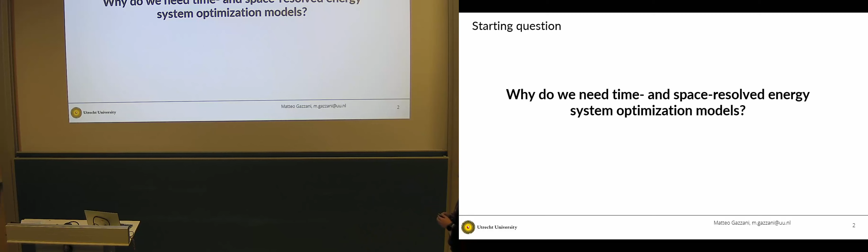Because we are not at a conference but more a cozy setting, I would like to start with a question for you: why do we need time and space resolved energy system models? And if it works, let's see... No, it doesn't.

It doesn't at all. Okay, well we skip that then because it was a Wooclap where you had to vote to actually put in stuff, but I have no clue why, transitioning to a different computer, it doesn't work. Or, no matter, okay.

I'll give you my answers, which of course are only partial. That's a bit how we like to use system optimization in our group, to support better understanding of non-intuitive complex systems.

When I was a PhD, I really didn't want to go into optimization. I was always of the belief, I understand this, I can understand how it works, let me look at the physics. Then I realized when you go with the time, and you have millions of variables, right? Forget about it.

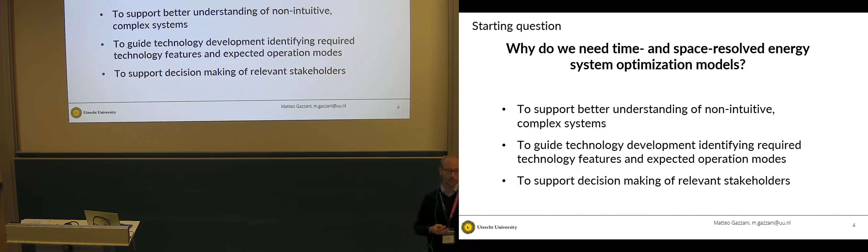Second, as Luca already mentioned, to guide technology development, identifying the required features based on the expected operation. And last, very broadly, to support decision-making of relevant stakeholders.

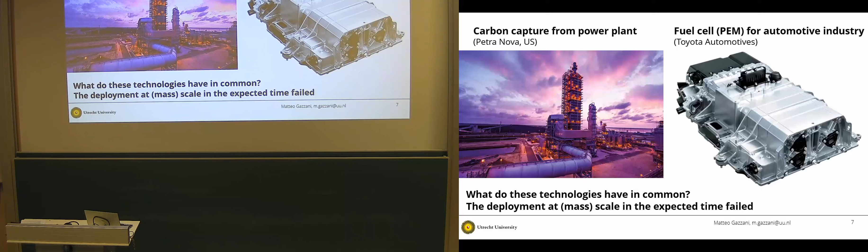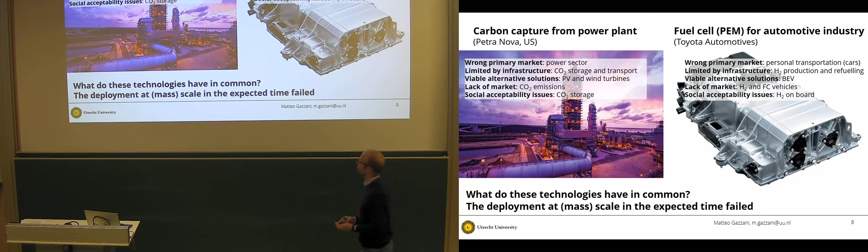Now, last year I talked about this, so just a recap. I showed this slide with two different technologies, and I said well, they both failed to deliver at mass scale because of a number of common reasons: wrong primary market, limited infrastructure, viable alternatives, lack of market, and social acceptability. Then I concluded technologies need to be developed while evaluating their role in the broad energy material transition. And I think Luca gave a nice example of what we can do.

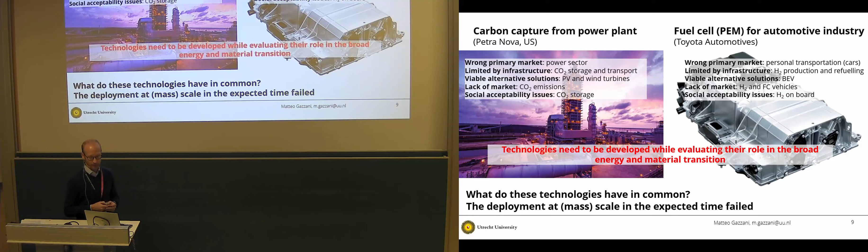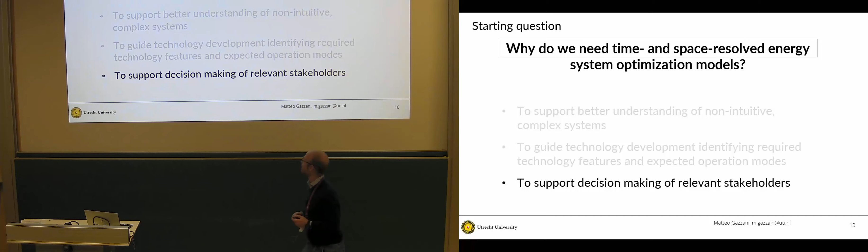Today I will talk about the last point, to support decision-making of relevant stakeholders. And I would like to do that by looking at the strange case of Dr. Jekyll and Mr. Hyde. So who is Dr. Jekyll? It's the Irsching 4 power plant.

A German power plant. I have nothing against German power plants, I think I could have taken Tavazzano, which is a natural gas combined cycle in Lombardy. The story would be the same.

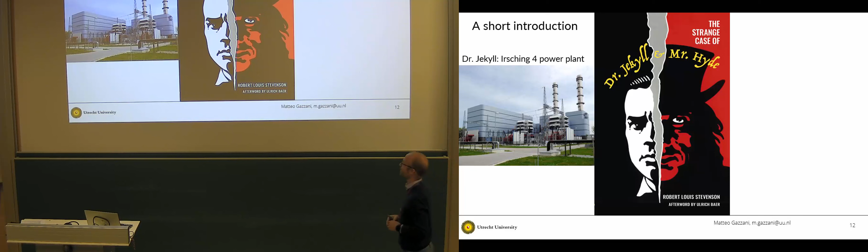And who is Mr. Hyde? It's the Irsching 4 power plant. And why is that the reason? So before that, let me just say a few words about the plant. It's a very modern combined plant, a Siemens H-class gas turbine with a cycle efficiency of 60.4%, 561 megawatt.

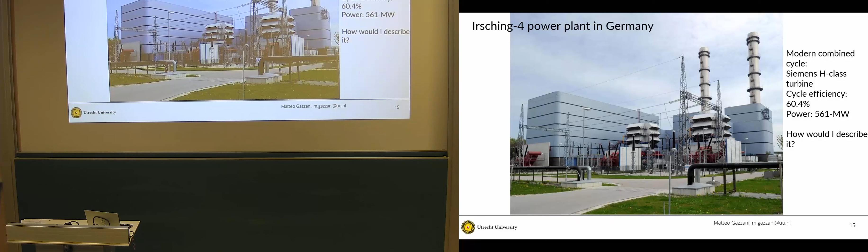But how would I describe it? I'm Italian, so I took a Ferrari and a typical Italian town. It's a Ferrari in a very small and old street. It will never, or hardly, run at 60.4%. And there's a little bit of history behind it.

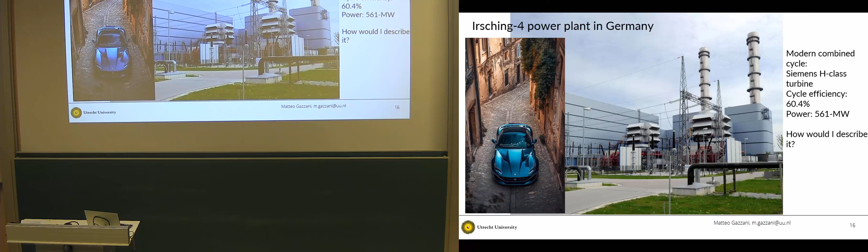So let's look at this history. 2011, commercial operation begins. Fantastic. Soon after, certified for setting a world record in efficiency over 60%, in the news. That's how I know it, because it was in the news, Power Mag I think.

Then, few years later, March 2015, closure notification. Here we get Mr. Hyde, due to the rise of renewable energy and unfavorable market conditions, high gas and low power prices. 2016, mothballed, almost dead, and put in grid reserve, saved by grid reserve. The plant was officially mothballed for commercial operation, but was simultaneously contracted by TenneT to be part of the grid reserve.

Nicely, in 2020 it reopened for commercial operation. The plant was officially returned to the commercial electricity market.

So what does this story tell? It tells that when you have a power plant, essentially you can easily turn it on, turn it off, also put it on the market, retire it, a company can handle losing this asset in a way. But it is not always the case.

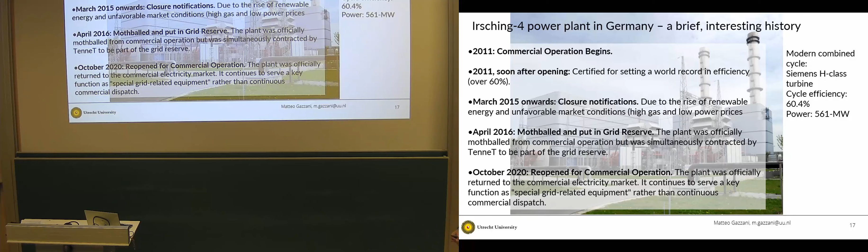If you have a complex infrastructure, you can't just switch off the power grid, right? Electrical engineers know very well, when they study the electric grid, they start from the existing grid. But the same applies to renewables. You're not going to build a huge wind farm or a very nice solar park in the middle of the desert to switch it off the day after, or 5 years after.

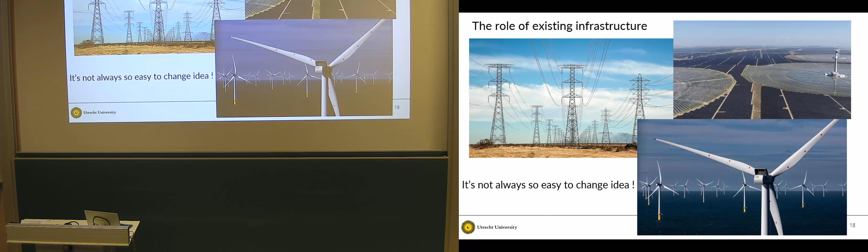You need to keep them, and you need to consider them in the energy system optimization that you want to do. Even more critical are chemical plants.

Here you see the port of Rotterdam, which is basically much larger than Rotterdam itself. All this is a large chemical cluster and a harbor. And here you see Ludwigshafen, BASF, a bit more dense, but also not something you can turn on and off in a few years.

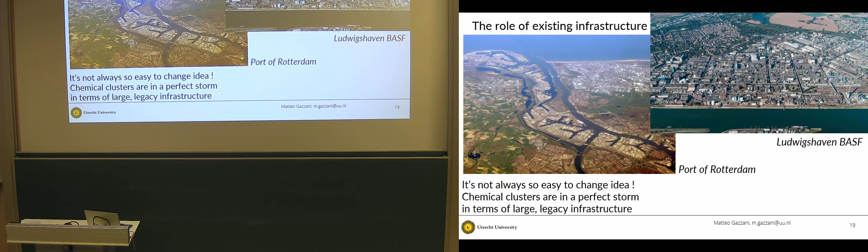I think in Austria you also have some steel mill plants that may be very well associated to a chemical plant. Chemical clusters are in fact in a perfect storm in terms of large legacy infrastructure. So this comes to my point that in many cases we need to consider the role of existing infrastructure and move away from a greenfield approach to a brownfield approach.

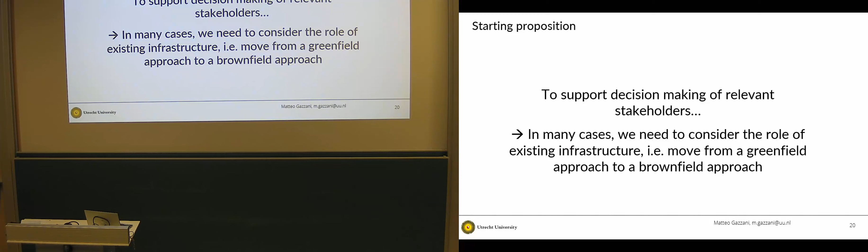Now, this comes with a lot of computational challenge. And here I'm referring not only to the fact that you have an existing infrastructure, but that you need to look at multiple years, a transition study looking at the development over a number of years.

Now, I'm just summarizing a few things that you know perfectly, probably. The time horizon needs to at least cover the lifetime, 25, 30 years in industrial settings. Maybe nuclear plants are a bit different. Also, if you work with buildings they will typically have a higher, longer lifetime. But usually 25, 30 years, and the decisions at year T depend on the remaining useful life of the asset and the performance at year time minus one.

So the optimal solution needs to understand when to invest. The key word is when to invest.

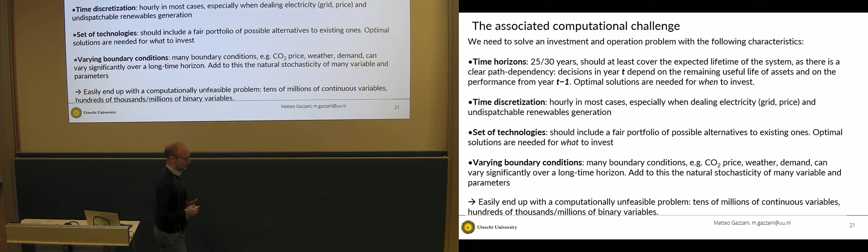Right, time discretization. We have hourly discretization. We need to still retain the physical fluctuation of the system, electricity prices vary. We need to have a look at the hourly resolution, but not only that, also renewables, the variation in wind and irradiation.

Another complexity is the set of technologies. We need to have a fair portfolio of different alternatives compared to the existing one. And this answers the question of what to invest. Optimal solutions are needed for what to invest.

Not least, everything is basically embedded within varying boundary conditions. So you have a lot of things that change over the year. We saw in some posters and in some talks the weather, the CO2 price, the demand. They have a large effect over a long time horizon. And of course, these add to the natural stochasticity of many variables.

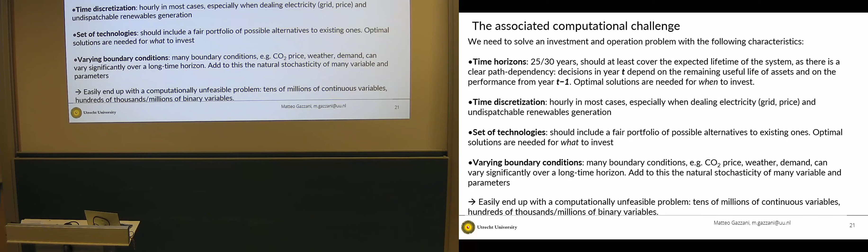So we easily end up, in Sonia's words, with 600 million variables. You have tens of millions of continuous variables, hundreds of thousands to millions of binary variables.

Now, let's take a little step back and see how we can include existing infrastructure. I don't want to be very comprehensive, this is just a few methods that we can use.

So one is, input data, along with, I would say, a myopic time period division. If you represent the system well and you look at different periods with a myopic capability of predicting what is changing, you can have a snapshot of the current situation and bring forward this snapshot into different periods. This is very easy to implement, has almost no time in the implementation.

But it requires a lot of data. Getting the data, probably you all know how difficult that is, and getting good quality data. It works well for representing the system at the current state. I think, though, that it's very time-consuming, and it's not nice to look for data, but this is something we must do in any case, even in the greenfield cases.

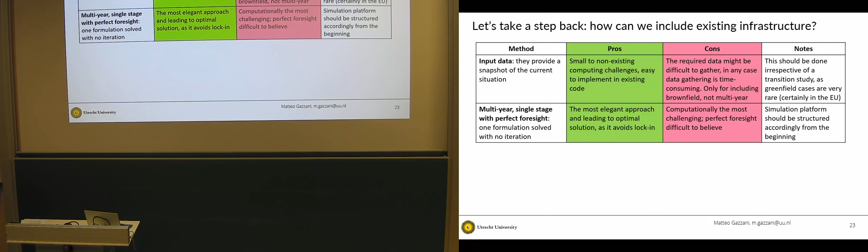It's important to note that if you're using an existing framework, it's not necessarily easy to adapt that framework to a multi-year single stage with perfect foresight. A last possibility is a multi-year with rolling horizon, where you have a sequence of resolutions for different time periods. Here, complexity can be managed, implementation is simple enough, and it's also aligned with how the real world behaves.

So you have moments where you decide what to do, what to invest. And yes, if you invested in something, you need to deal with that, right? It's in your portfolio. Of course, here we have a risk of suboptimal, long-term lock-in. We have fixed parameters for the years in the time window, and it probably is the most used approach for multi-year MILP problems.

To add to this, in all cases, the deterministic model can and should be extended into stochastic dynamic programming.

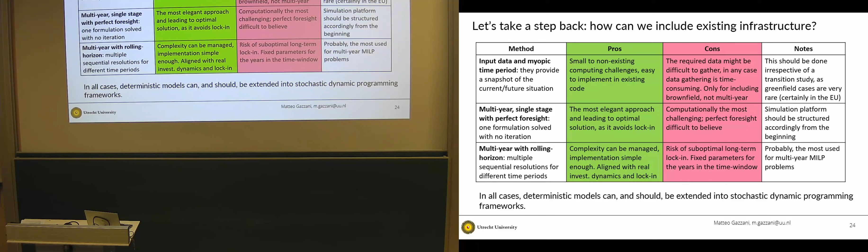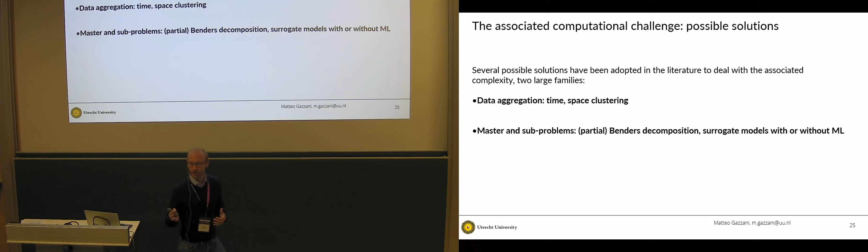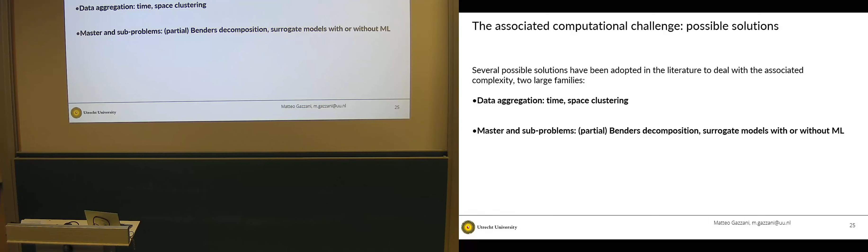Again, here it's really just a few words, I don't want to be very specific, so there are plenty of methods. We basically heard about possible nice and useful methods so far. I would say two big families: data aggregation - time, space, clustering - and then breaking up the problem into multiple problems: partial Benders decomposition, surrogate models with or without machine learning, you name it. And these are all helpful.

Now, this was kind of a teaser. I would now like to discuss a couple of cases that we examined, but I will first start with quickly introducing the modeling framework that we use. It's not your ERC, but it sounds similar: Adopt-NET0.

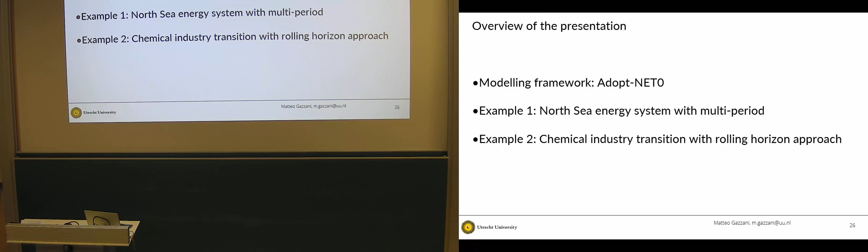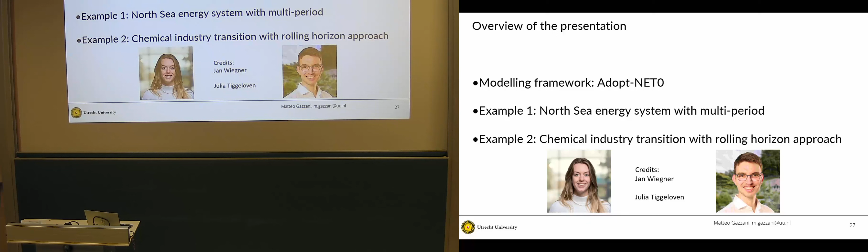I also wanted to stress that the work that I'm presenting, example 1 and 2, is part of the PhD thesis of Julia, who we have here, and Jan, who we had last year and unfortunately couldn't be here this year.

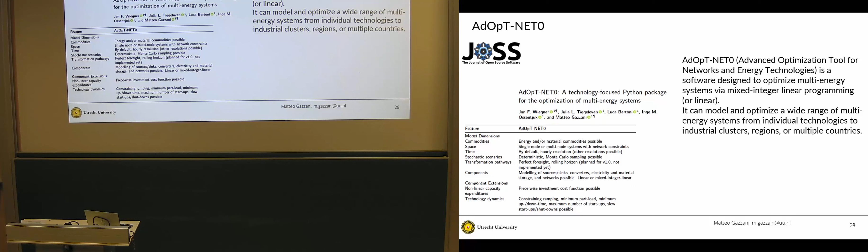Now, Adopt-NET0 is an open software. We published it in the Journal of Open Source Software, and essentially it's a tool that has a bit of a technical hat, as you might have seen already from Luca's presentation, where we can do optimization of multi-energy systems with mixed integer linear programming or linear programming, and it can model a variety of different systems, from individual technologies to industrial clusters, regions, multiple countries.

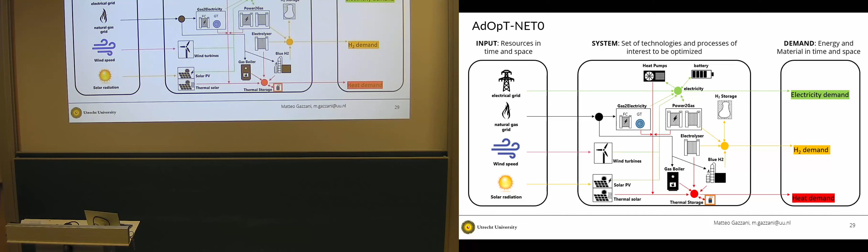We have a large number of technologies - this is not representative of all technologies, just a few examples - and it connects to the required input. This is for one node, and it can model a network with a certain limited capacity, though. I think other models like PyPSA do large networks much better than Adopt-NET0, but still, you can model a network of maybe 20 or 30 nodes.

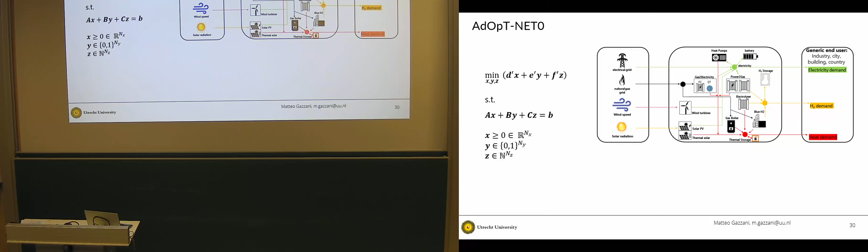So it's formulated in the most generic way as a mixed integer linear programming framework, and we have input data that include weather, space description, user demands, energy prices, carbon rates, and technology and cost performance.

Decision variables include the technology selection, the sizing - using different approaches, for example, to account for performance at different sizes - scheduling, of course the operating load, the network size and operation, and what comes in and out from every node. Constraints include technology behavior, the capacity of the network and its behavior, and the energy balances, of course, per node and in total.

And finally, we can optimize for costs, but also for emissions, and we see that changing the objective function helps a lot sometimes. For example, in some cases, the case that I will show later, we also optimize for the maximum energy production - if you have a wind farm, for example. Matteo is now optimizing for the total length - we are trying, at least, the total length of hydrogen pipelines under a certain cost constraint. So we have flexibility with the objective function, just to say that costs and emissions are not necessarily everything we need to optimize.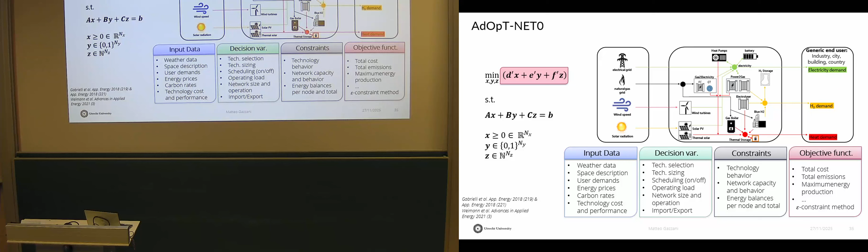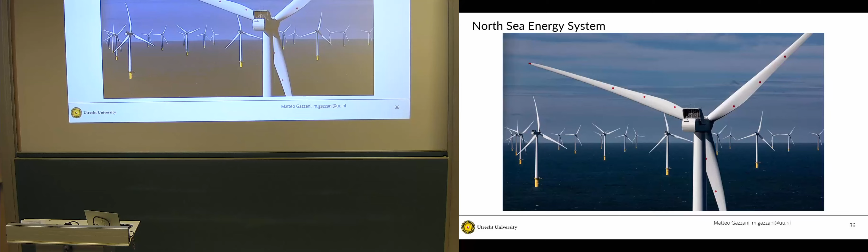I would like to start by discussing the North Sea energy system, and this was part of Jan's project. Essentially, we have a possible future powerhouse of Europe, the North Sea. This is shared by several countries, and we wanted to understand how this system should evolve and look in time, considering the wind potential, and also the use of existing infrastructure present in the North Sea.

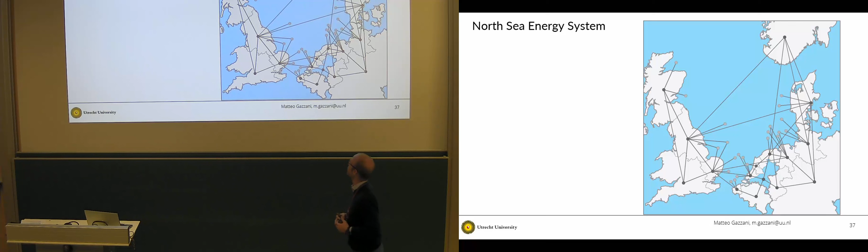So the North Sea is definitely not an empty infrastructure - there is plenty of stuff, most notably natural gas pipelines, but also more and more electricity cables. And there are areas that need to be maintained for fishing, for some military activities. So there is plenty of stuff, and we need to understand how this region needs to be optimally parceled and used for the energy system.

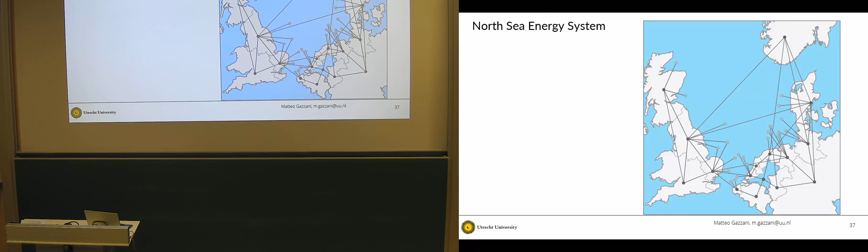What did we do? So we started by looking at the existing infrastructure. This basically means data collection. Today, there is an existing electricity grid, there are existing offshore pipelines, and there are existing generation and storage assets around and within the North Sea.

Then we looked at 2030 and 2040, so the evolution through these two decades. For 2030, we said, well, we could optimize the system, but do we need to do that? In fact, there are already the TYNDP plans and national tenders, if they are successful, because this is also something to be seen. Recently in the Netherlands, a national tender went completely empty, and in the UK it happened a couple of times. So we took this as...

...what will be the energy system in 2030, but we did allow for some flexibility in it. First of all, the operation of all dispatchable assets, and we allow for electricity grid expansion, and also for the use of hydrogen - producing hydrogen with electrolyzers, using hydrogen with fuel cells, and transporting it onshore and offshore. New batteries were also possible, and the expansion of the hydrogen grid, notably onshore but also offshore. So we considered the production of hydrogen offshore too - something some Dutch associations like a lot.

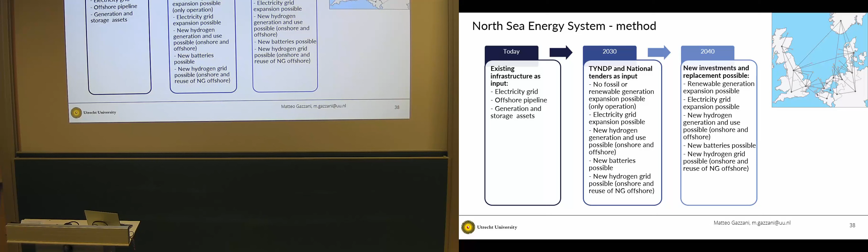Then we followed with 2040, and in 2040 there is more freedom to play. So we allow for the expansion of renewable generation, and again with all basically the possible options of 2030 - the infrastructure development.

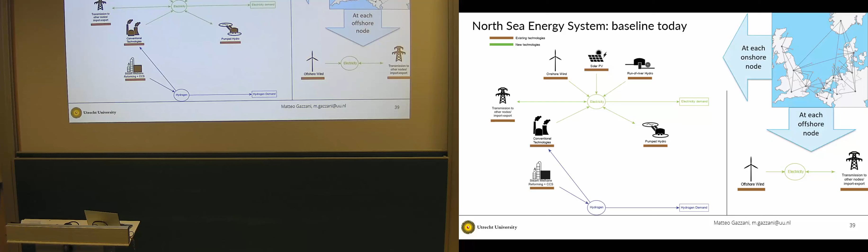Now, the baseline is what we have today, and this is represented overall by this system. In the offshore node, we have wind farms and transmission, and onshore we have a number of different renewable and non-renewable assets, but also a hydrogen demand that is supplied today with natural gas reforming.

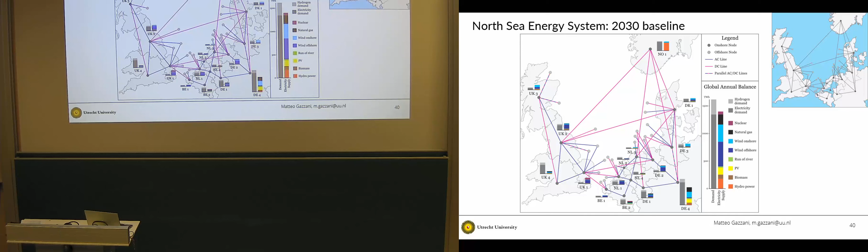This is the 2030 baseline. So you see here, essentially, a sort of validation of the TYNDP. We were quite happy to see that we could find a solution for the design of the TYNDP. You see specifically for every country, every node, the different set of generation portfolio, and also how the demand of hydrogen and electricity is satisfied.

All right, but what about the expansion of the infrastructure? I would like to focus now on two: first the electricity grid, and then hydrogen. So what you see here is the electricity grid expansion with the costs, emissions, and cost per ton of CO2. We have a reference case, the TYNDP, and then we allow for multiple expansions - the case where we allow onshore, offshore, and cross-border expansion of the electricity grid, the case where we don't allow international expansion, and where we only allow onshore grid expansion or only offshore grid expansion.

What you see is that by improving the electricity grid, especially when allowing for offshore and cross-border expansion, we get a reduction of costs, and that comes with a reduction in emissions as well, simply because we are using the electricity generated by the wind farms.

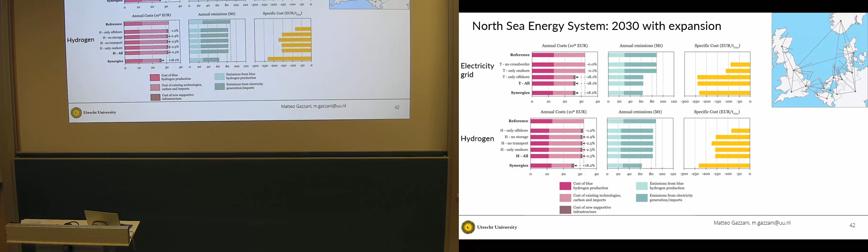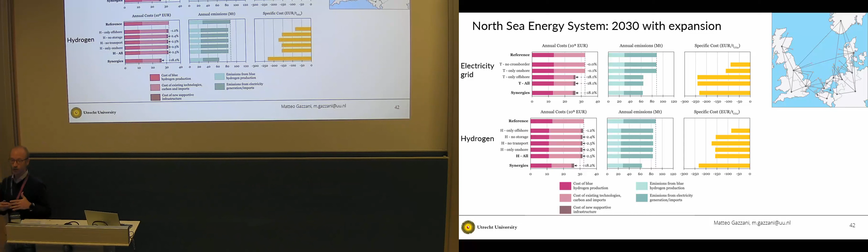Then what about hydrogen? We have a similar case. We depart from the TYNDP reference case, and then we have a number of scenarios: the expansion of hydrogen only offshore, where we don't have any storage, where we don't have transport, and where we only look at onshore. Essentially what you see is that expanding the hydrogen infrastructure helps, but only a tiny bit, not much. So if you need to improve the infrastructure of the North Sea, you better put your money - or our taxpayer money - into the electricity grid.

Then we went to 2040. Here you have the transmission expansion, the hydrogen, and also the electricity storage, which in the interest of time I didn't discuss for 2030. Essentially, again, you see that the electricity infrastructure is really the key to improving the energy system of the North Sea, and that this comes with quite substantial additional capacities of renewables in terms of offshore and onshore wind.

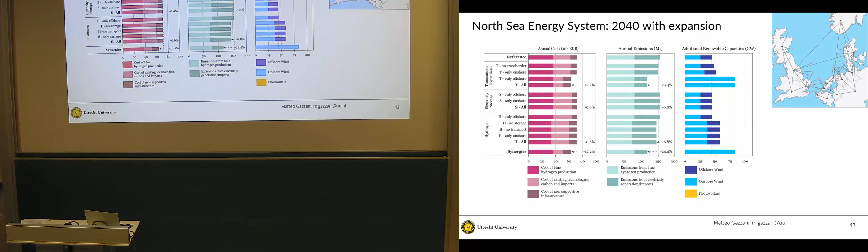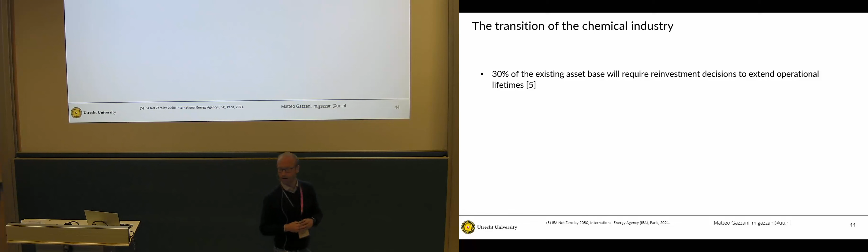All right, let's move now to the second case, the chemical industry. Now, the chemical industry is quite a case because there is a large fleet of existing plants, and operators need to decide what to do with those plants.

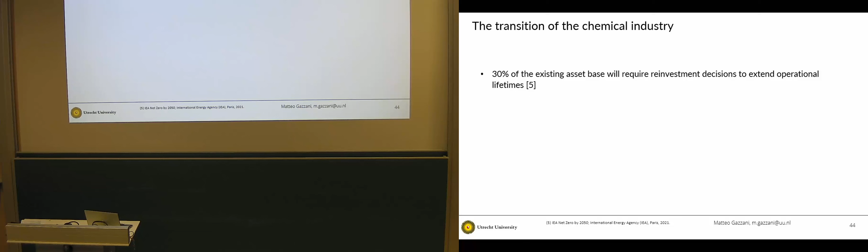In the Netherlands, for example, we are seeing that a substantial number of companies are leaving because there are no more the conditions to operate with a nice economic return. Around 30% of the existing assets will need to have a decision on what to do with the investment or to extend their operational lifetime.

So this is also an opportunity for new technologies, to understand and to see if we can go away from the existing technology portfolio and invest in new technologies that have lower emissions.

And finally, there is no greenfield case for the chemical industry in Europe. I guess whatever country you pick, ask to have a new chemical plant. Ask the population. No way to build a new chemical plant.

So it's very important, it's fundamental that when looking at the transition of the chemical industry, we do that departing from the existing plants. Yeah, it's complicated, but it's what we have in Europe.

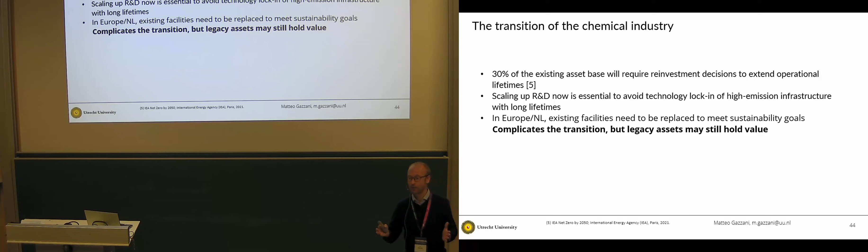And a valid approach could be that we don't do any chemical synthesis in Europe anymore. Then we may go to a question of security of supply, but that's a bit of another story. So again, it is important to develop the tools that can support the long-term decision.

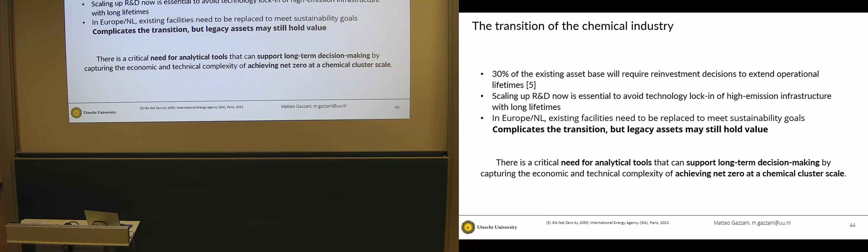And what complicates this is also that the investments are very large as well, much more than a natural gas combined cycle. They are always in a number of billions.

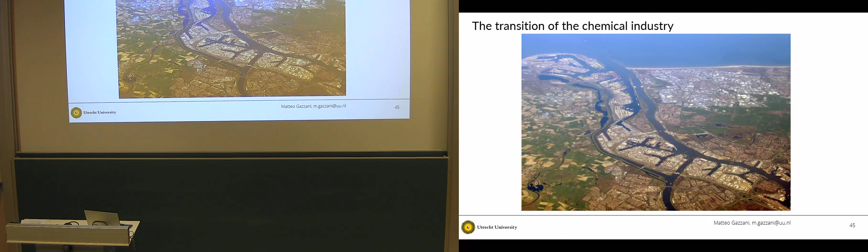I would like to discuss the case study of the Netherlands. Actually, it's not the port of Rotterdam, but I will show that later. And what did we do? What Julia came up with? Here you see the short-term, mid-term, and long-term time horizon.

In the traditional greenfield approach, what we would do is run the optimization for the short term, so 2030, say, and get an optimal solution. We bring this optimal solution as an input to the midterm, rerun the midterm, and so on and so forth to the long term.

So this is kind of the multi-period myopic with data gathering that I was talking about before. The problem here is that you have a large infrastructure present, and this infrastructure has a certain discount period. So when building that, you're accounting that you will operate that plant for a number of years. So you need to consider that cost in your optimization.

So we came up with a brownfield approach where we don't jump like this, but we follow a straight line. That is, we start from the current layout, we do the short term, we get the optimal solution, we retain the capacities, and we go to the next, and so on and so forth.

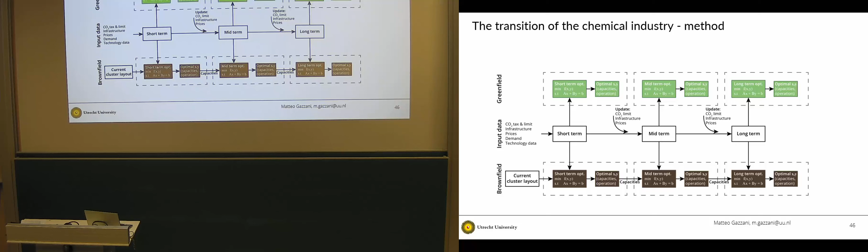We run two different case studies, two existing plants. So Zeeland is a chemical cluster in the south of the Netherlands. Both are south of the Netherlands, Zeeland and Chemelot. Both clusters produce in large amounts ammonia and ethylene. They are also used for other chemicals, but we look at these platform molecules: ammonia, used for fertilizers, and ethylene, essentially used for plastics.

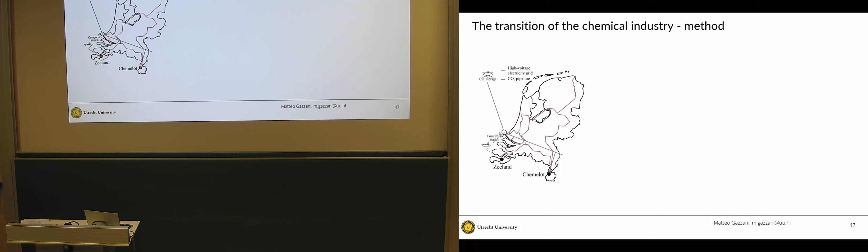And this is about the technologies, the portfolio of possible technologies. It's way larger than what we have in the electricity domain. So you really have many different ways to produce these chemicals. I will try to guide you a bit through this. Do I have the time? I still have 10 minutes, okay.

So on top, you see the conventional fossil-based technologies: crackers for ethylene and, let's say, the reforming of natural gas plus the Haber-Bosch process to produce ammonia. You can still use this now with a bio-based feedstock, so you can substitute - that is why it's green - you can use bio-based biogas, for example. Well, maybe.

Then you can electrify the process. Electrification is in yellow. So now the cracker runs on electricity, the reformer also runs on electricity. You avoid the scope 1 emissions, but you still have all the emissions associated to the products, scope 3.

Then you can completely change the technology, so you don't rely on the conventional ones, but you go to different types of processes. This could be, for example, making ammonia with green hydrogen via electrolysis, or making olefins, ethylene and polyethylene, with electrolysis of CO2, CO2 electrolysis.

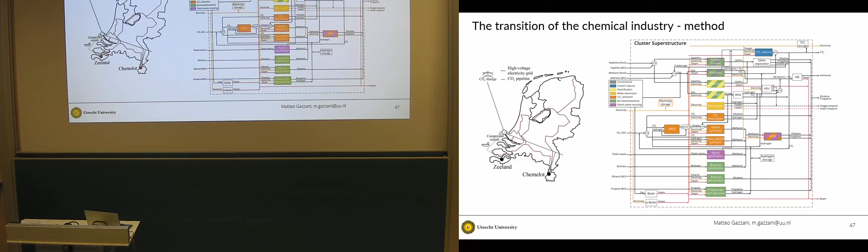We also consider the ethanol and propane, bioethanol and biopropane routes, that are especially important when imported from, for example, Brazil. Now these are all options, so that's where the complex part of the mixed integer decision comes in. You need to decide which of these technologies should be selected.

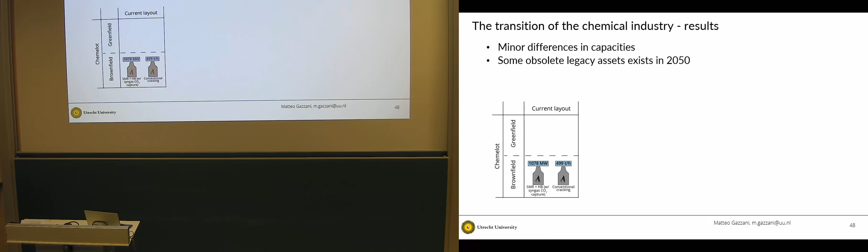All right, let's look at some results. So we start from the current layout, and you see here the case of Chemelot, the big one of the two examples that I showed, and we are comparing brownfield on the bottom and greenfield on the top. Now, the current layout in the greenfield, we don't see anything, and the brownfield is all fossil.

2030, so the short term, you see that basically ammonia switches to hydrogen and electrification, while ethylene is basically relying on a combination of plastic gasification and biomass. The two things are the same for the greenfield and the brownfield.

Now here you start when we go to 2040, and here it's important to note that in 2030 we just minimize the cost, while in 2040 we also ask for an emission reduction, minus 50% of all emissions, scope 1, 2, and 3. And now you see some differences arising.

So for the ammonia case, the use of fossil natural gas with SMR plus CO2 capture is optimal, of course, because you are not considering this asset when doing the 2040 greenfield, while in the brownfield you rather stick to the electric SMR because you have already installed it in the previous year.

And you can now play a bit with tuning the remaining things. For example, the propane dehydrogenation is mothballed in a way, while CO2 capture is installed to allow for synergies with the plastic gasification and the CO2 electrolysis.

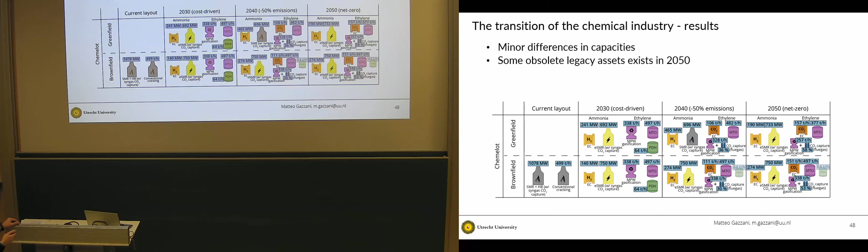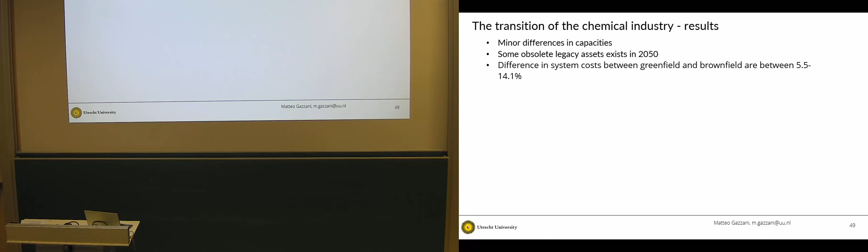So there are some minor differences in capacities. Some assets become obsolete in 2050. The difference in cost is around 5 to 14%, and I'm showing here.

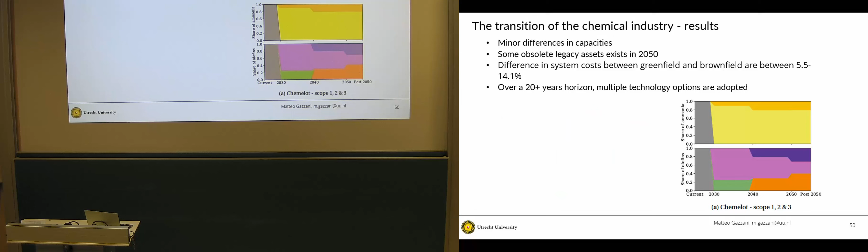And then you can nicely show the transition in a similar graph where you see, for example for Chemelot again, over the years how the different technologies are adopted through time. I think this is a nice outcome to give to decision makers, for example in the chemical companies.

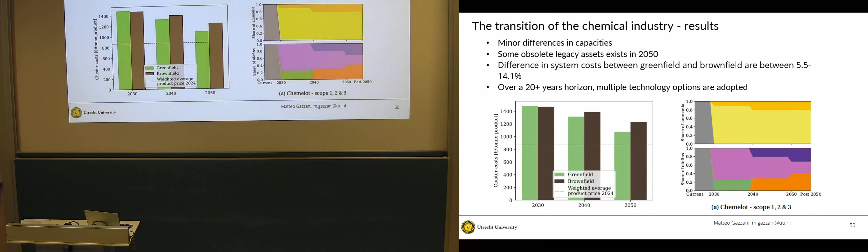All right, then I would like to conclude, even with a bit of time left. So I think that transition studies are difficult, but can really provide new insights that are needed for many problems that we have to deal with.

Existing infrastructure, especially when it's complex, and more especially when we deal with the old continent, or probably this would also apply to many locations in the US, needs to be included from the beginning. There are a plethora of methods that can allow for this, and I see this community working very much on making better methods that we can use to tackle the complexity arising from these transition studies. With this, I'm very happy to discuss these results.